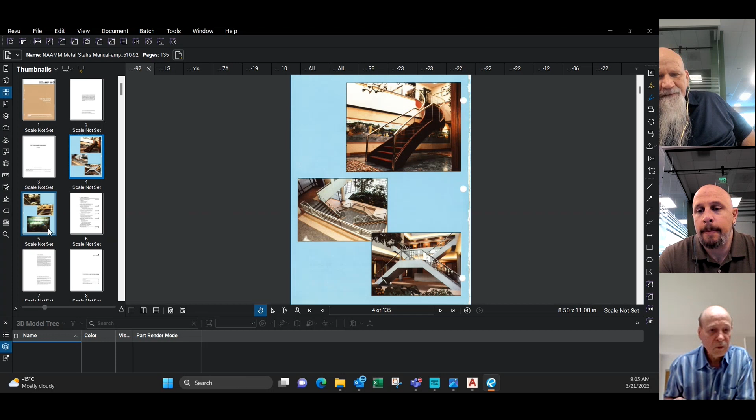Both Tim and I were both at Specialty Welding. Oh, Specialty Welding, okay, then Amazon. That's right, Amazon Hank. Yes, working on that. Yeah, just did that one. Yeah, I kind of did a little bit of work on that as well, just kind of checking drawings. I know Adam Rosenwasser and Eduardo took on the bulk of work, I guess, as project managers on that job. But yeah, that was a nice job. I just got pictures this morning. It looks like it installed really nicely.

Oh, okay, yeah. Are they into the finishing the stair mode right now, or are they still just kind of finishing the install of the stair? I think he said yesterday that they'd be painting this week. I think they're ready to paint. Okay, I see, great, okay.

Like I was saying, this manual just kind of goes through all the different types of stairs that you run into, but I'm sure you guys have probably seen quite a few different types of stairs.

For myself, before I started with Synergy, I was into structural and miscellaneous metals. So I did kind of a lot of your typical pan stairs and stuff. The stairs with Synergy now, some of them are pretty nice, but the treads and risers and stuff like that can change quite a bit. But most of the stairs, it's still your typical channels or HSS tubes for the stringers.

So it just goes through different stairs. We don't really do ship ladders. So it's something to reference if you're ever looking for it. It gets into some details on different types of stairs.

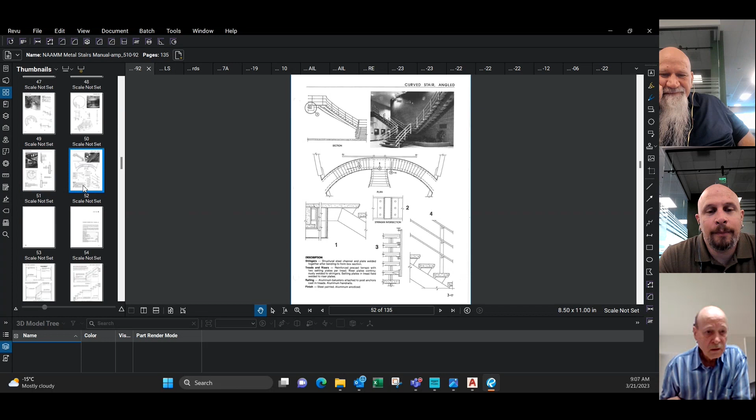And then it kind of gets into some of the construction details, just landings, different types of treads. We don't usually use these - these are more commercial type of treads or whatever. Like I was mentioning, we do supply the treads sometimes for stairs. We do a lot of wood treads, but usually the wood treads and risers are most of the time by others.

Different types of nosings, but that'll usually show up on the architectural drawings, or the project manager would let you know what type of edgings they have on the stair if they're required by the architect. Different types of handrail ends. We don't really do a lot of picket rails. We do a lot of glass rails, I guess, mostly.

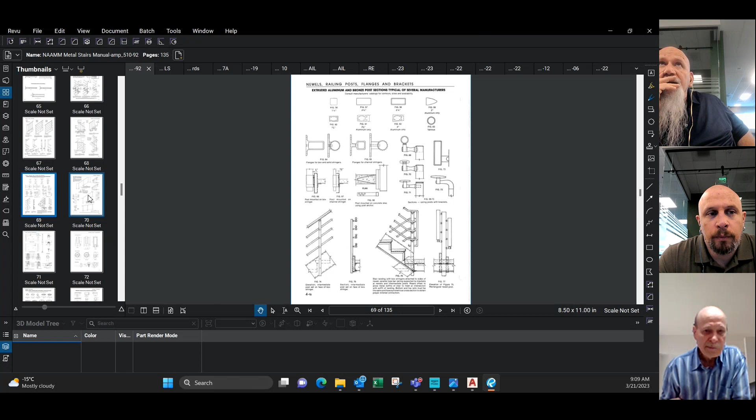Although I think Amazon Hank, though, I think that had pickets, didn't it? Stair F, I think. See, F, we didn't do F. Okay, we did J and H. Okay, yeah, I think stair F, that was kind of the big one that went up quite a few floors, but I think it wasn't really pickets. I think it was kind of bars, I believe, for the pickets.

And then it kind of gets into the glass guardrails, which we do a lot of. It's usually glass sitting in an aluminum shoe, with different types of shoes depending on the thickness of the glass, and different ways of setting the glass in the shoe. Sometimes it's Por-Rok, just a cement that sets the glass, and other times we use a removable glass system that clamps the glass into place, so if the glass breaks it's easy to fix or replace.

So there are different shoe details and different handrail moldings in here that we don't really use a lot. A lot of the handrails are just stainless steel tubes, or wood, or different types of things.

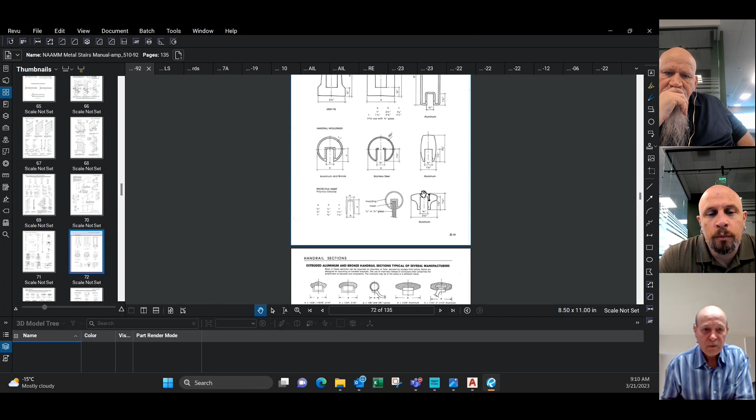And then it gets into more handrail shapes. These are usually defined in the very beginning of the job. We usually have design assist meetings where all this stuff gets sorted out. If you ever have questions, you usually go to the project manager and they'll assist you on whatever questions you have regarding the job and types of material.

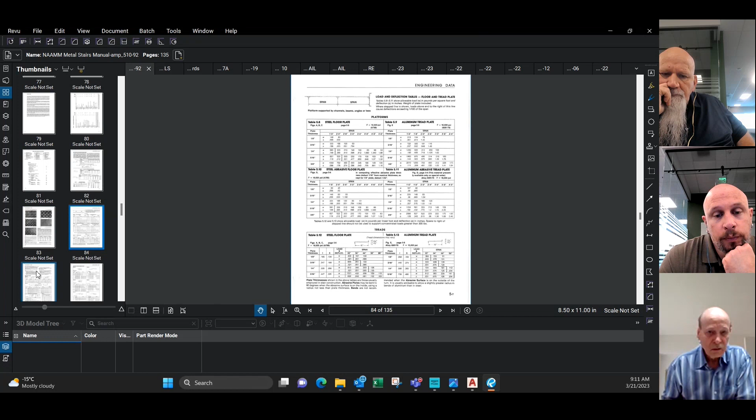And then in the back, it gets into different kinds of loads, which we don't really do. The engineering usually takes care of the loads on the stairs and comes up with the thickness of the tread and pan materials and the stringer sizes, so we don't really get into that. Grating, we rarely use - that's more of a commercial type thing. And then it gets into loads and stuff, but we don't really get into that - that's more engineering.

So it's just kind of a handy manual to have if you're looking for details. This gets into guides and specifications a little bit, different material types, fabrication, and a glossary - so it's a good manual to check into if you want. But usually the project manager would answer most of your questions, or they're figured out in the design assist meetings we do in the beginning, where a lot of things are figured out as far as the stair.

Next on the list, we have the Accent standards manual - same thing, I'm not quite sure where it is in the filing system. That's the new system Synergy has, but I'll send it to you. It's kind of outdated, I think - does it have a date on here? Yeah, this is from 2013, so it's already 10 years old.

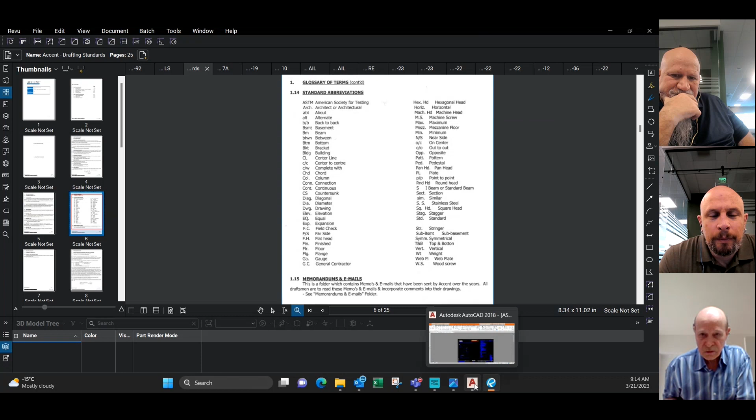I can just open up something else here now - we actually have our standard title block cover page that we use for drawings, and there's a zip file with all the different sheet sizes, like 24 by 36, 11 by 17 for shop drawings - those templates I'll send you guys as well. And we actually now have on the cover page some abbreviations, a glossary of the different types of abbreviations that we use.

So this is kind of overrode, I guess, by what's on the cover sheet. Memorandums and emails - that's something old that doesn't apply anymore.

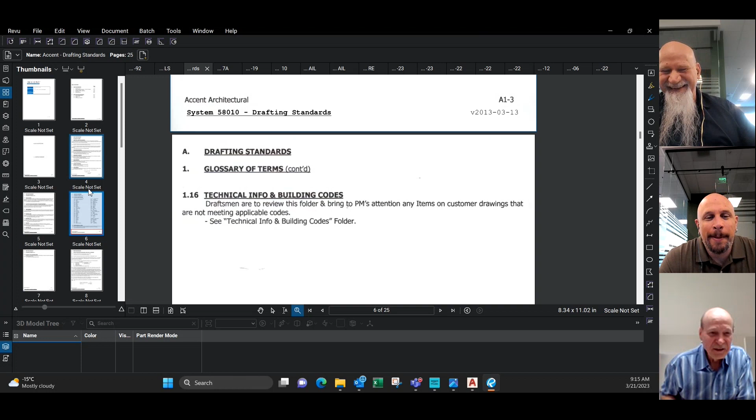Technical info, building codes - technical info doesn't really apply anymore. As for building codes, I'll show some stuff on that a little later, but if you guys have been in the stair industry for a while you probably know most of the typical building codes. If I have a problem with a building code now, I just Google it - all hail Google - or ask one of the detailers at Synergy. Somebody usually knows. They're mostly typical, although I've been finding as we go into New York, they have a little bit different codes - special codes.

Submittal or action drawings, general detailing, and the different sheet sizes - like I was saying, I'll send you the templates for these drawings after the meeting. So that covers submittal or action drawings.

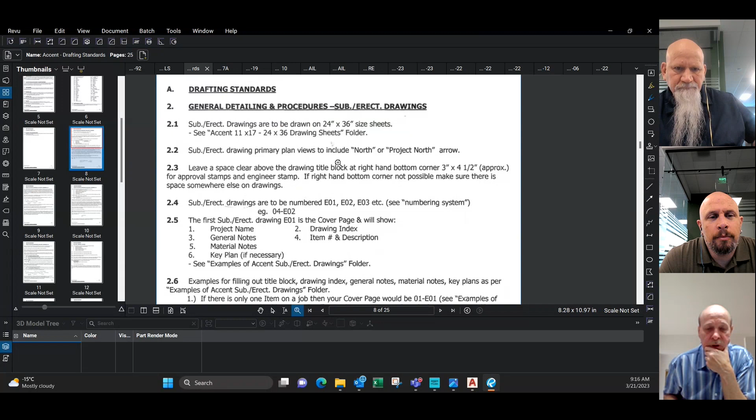Usually we'll put a key plan on one of the drawings. I think I probably have an example here - I don't know if this one has a key plan. Let's see what we got here.

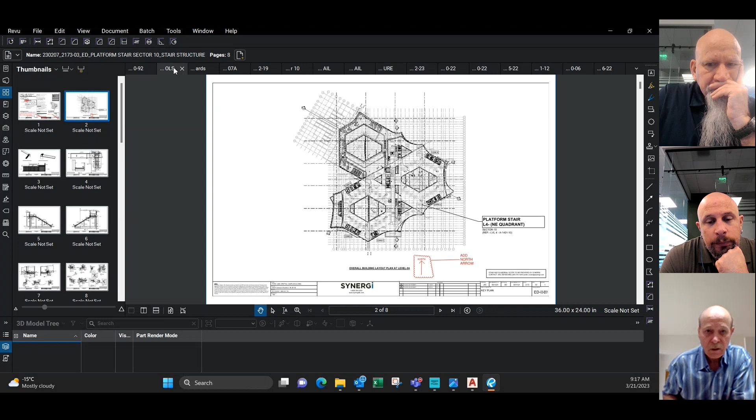This is an example of a key plan. Sometimes they put it on the cover sheet, and there's also a second page that's a larger key plan. You can do either, it doesn't matter, it kind of depends on the size of the job, like if you have multiple stairs on a job. But usually we'll add a north arrow, just to help guys in the building orientate themselves.

This does not apply anymore to submittal or erection drawings. The numbering system we've kind of worked out - we've got a number down in the bottom here. Usually the drawing number is dictated by the item.

And the item is usually dictated by the scope of work. Sometimes, not all the time, you'll get a scope of work - if there's 6 stairs on a job, there might be one stair that's item 1, the second stair might be item 2, the third stair item 3. There might be a guardrail around the opening, that might be item 4. It might be smoke baffle glass underneath, that might be item 5. But usually the project manager breaks that up and lets us know what the item numbers are.

So on a submittal erection drawing, the item number comes first, and then the drawing number comes second. So this example here is item 04 on drawing number 2. As you get into the drawing system, you'll see - I'll send you a couple of sample jobs that will assist you with that.

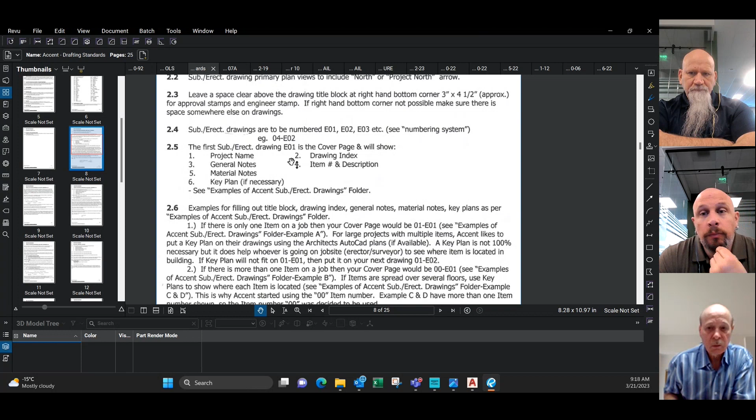The first submittal erection drawing usually has - this is kind of all on the new cover sheet everybody's using now - the general notes that are usually standard. They rarely change.

Material and finish notes would change based on what the job is - the types of steel, types of stainless steel, or the finishes. If there's mesh guardrails, the top rail material, whatever it is, if it's painted, that's where all that is added into the material and finish notes. This is just a standard they put on the cover sheet, but it would change to suit your job.

Usually all the material and finishes are figured out in the beginning in design assist meetings, or from your project manager. I usually do a lot more checking now, so what I do at the beginning of jobs is get the architectural drawings, the structural drawings, and the specs. That's usually what I use to check the material and finish notes, plus whatever I've got from the design assist meetings or the project manager.

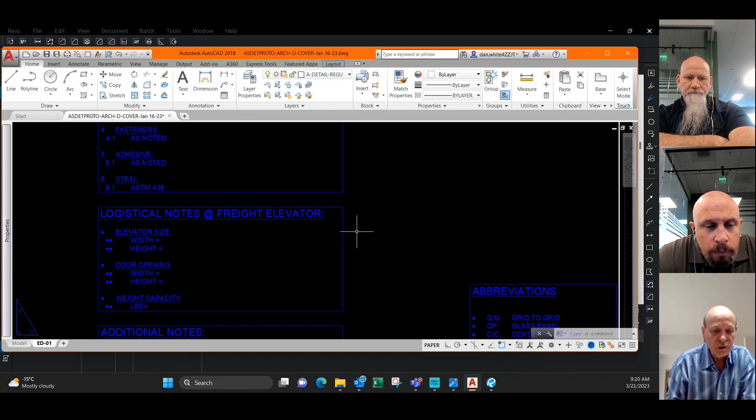So that's on the erection drawings cover sheet. They've also added logistical notes for the freight elevator. Now that we're into modular stairs, they need to be made a certain size to fit through a window, up an elevator, crane through a roof, or however they're getting it into the building - that's usually figured out at the beginning as well, so we've started adding that to our erection drawings cover sheet. For additional notes, if it's a 100% CD set, we add the date of that set on the drawings here for both architectural and structural. I'll show some examples as we move along.

So that's kind of the stuff that's on the cover sheet now. Examples for filling out title blocks - we just kind of looked at that, and I'll show some examples later on. For item number - that's what I was referring to - the item number and scope of work are supplied by the project manager, although they don't always supply a scope of work, but the project manager should be able to help you out with which item numbers to use on the job.

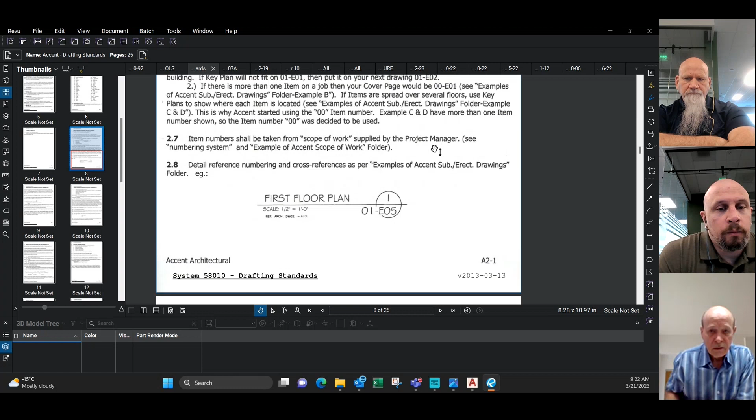Detail reference numbering - this is kind of your typical callout, which I'm sure you guys are familiar with. Again, it's the item number, and then this would be the drawing number.

Field check drawings - we used to cloud a dimension if we needed it to be field checked. Now we put VIF on the drawings right here, so we don't cloud drawings anymore.

Mark numbers, rectangular box, we don't do that anymore. That's just in regards to, on the erection drawing, you'll have a mark number for a post or a piece of glass or whatever. We used to put a rectangular box around it.

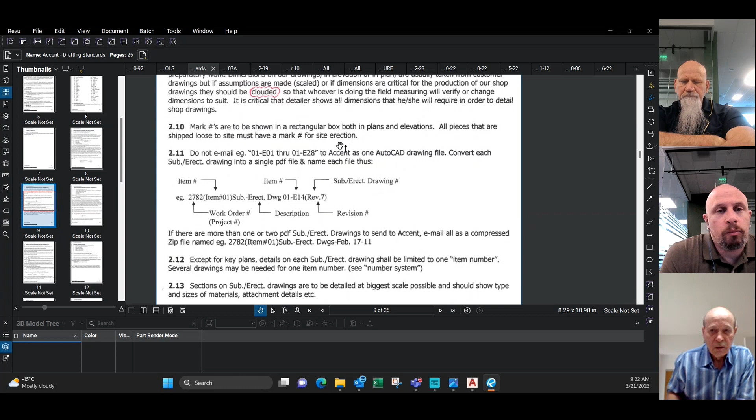Each piece shipped to site must have a mark number on it, which, of course, do not email — that was just about file sizes. Doesn't really apply anymore.

Marking numbers when drawings are sent to the project manager: I kind of use this type of system with the project number, the item number, what it is, then the drawing number, and then the rev number. As we've gone along, different drawings I've gotten from different outfits, that doesn't always apply. So it's not really standardized, but I guess it should be standardized. But because everything goes through so fast, you kind of usually leave it the way it is. That's kind of a marking we like to follow, something along that line.

If there are more than 2 PDFs, submittal erection drawings, send email. That's kind of outdated. Except for key plans, details on each submittal erection drawing shall be limited to 1 item number. Don't do that anymore.

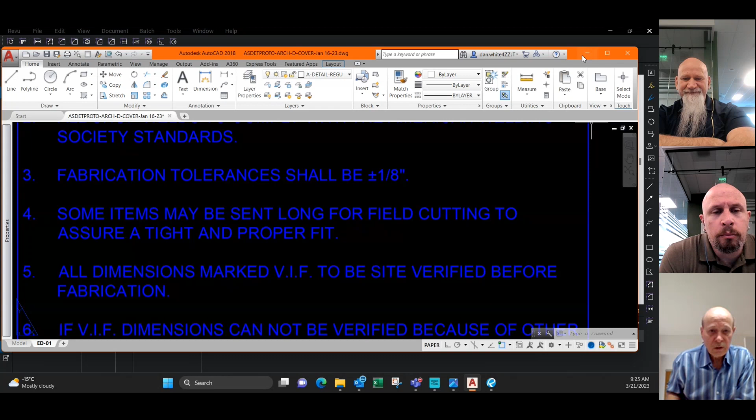Location of field splices for rails and lengths of rails. Sometimes when detailing our handrail, we put our field splices in locations that dictate based on the length of material ordered. These are kind of standard lengths here so that there's not a lot of waste of material. It's not critical, and you can always weld a couple pieces together if you need to, but we usually try to keep it so we're not wasting material.

Need to ask the PM maximum lengths of cladding and glass. Cladding is usually dictated by bending — if the cladding's bent, what the shop can bend sizes, usually around 10 feet or so, but need to check with the PM, and that could dictate your cladding lengths and cladding sizes. Usually the cladding joints are lined with glass joints if there's glass. Sometimes they're aligned with millwork — sometimes there's reveals in millwork that you need to line up with. But that's stuff that can be discussed with the PM.

Slotted holes or oversized holes — usually with posts, connections, and that, we like to use either oversized holes or slotted holes of some size, just to give the guys on site a little bit of adjustment. But that can be discussed with the PM.

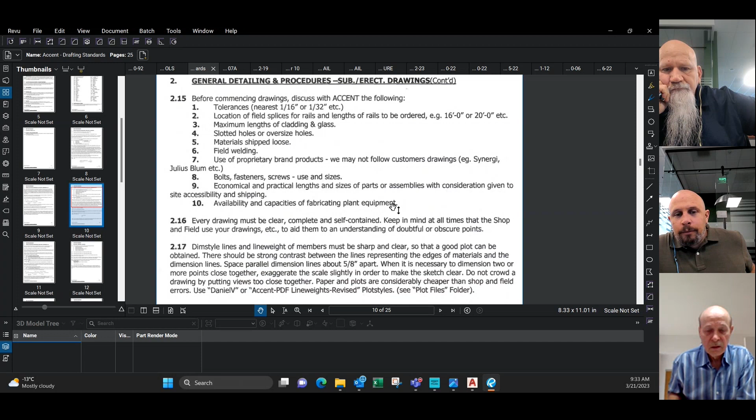Economical and practical lengths and sizes of parts - we just discussed that. Availability and capacities of fabricating plant equipment - that goes back to bending material, especially when you get into radius stringers or radius handrail. That may dictate where you're going to have joints on the finished product. But that stuff is usually discussed at the beginning of the jobs with the PM.

Every drawing must be clear, complete, and self-contained - that's a no-brainer. Dim style, line and line weights - this doesn't really apply anymore. That was back when we were all using AutoCAD and everybody had their AutoCAD set up to different dim styles and line weights. Now we're all using Advanced Steel, so it dictates the dim style and line weights, and it's been set up by Synergi for everybody to use. So at some point, everybody's going to have the same setup.

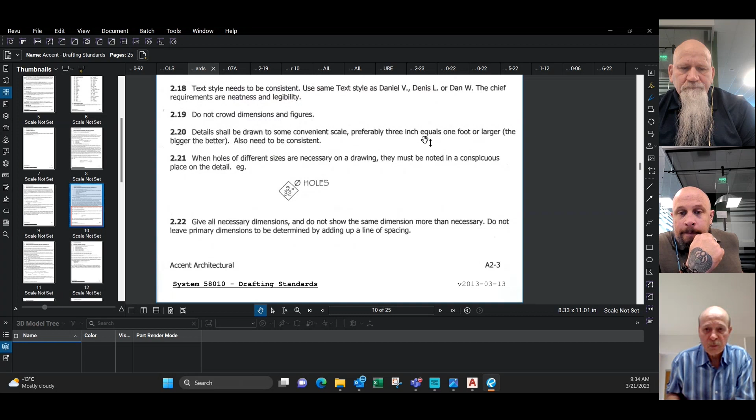And the same with text style - it should all be the same because everybody will be using the same software. Do not crowd dimensions - Advanced Steel kind of does that for us now, so that's not an issue. Details shall be drawn to some convenient scale - we discussed that before, bigger is better, but again, Advanced Steel kind of does that.

Are you guys both familiar with Advanced Steel at all? I'm not familiar with it. I haven't worked with it at all. Neither of us have used it. Oh okay, yeah, I'm kind of in the same boat.

I don't really do that much. I hardly do any drafting anymore, but I'm kind of from an AutoCAD background. I did do the training on Advanced Steel, but that was a few months back, so if you don't use it, you lose it.

I guess you guys will be learning the new system, and we have outside detailers, some of them using Advanced Steel. I think we've got a couple of draftsmen still kind of doing SolidWorks. But Advanced Steel usually spits out most of the drawings to the proper size and everything else. The only thing I've been finding with Advanced Steel is they don't really do a very good submittal erection drawing. Not that they don't do it, but especially for spiral stairs and stuff, they just don't look that nice because they draw it segmented, so a lot of black lines and stuff. It doesn't look that great, but we're working on fixing that.

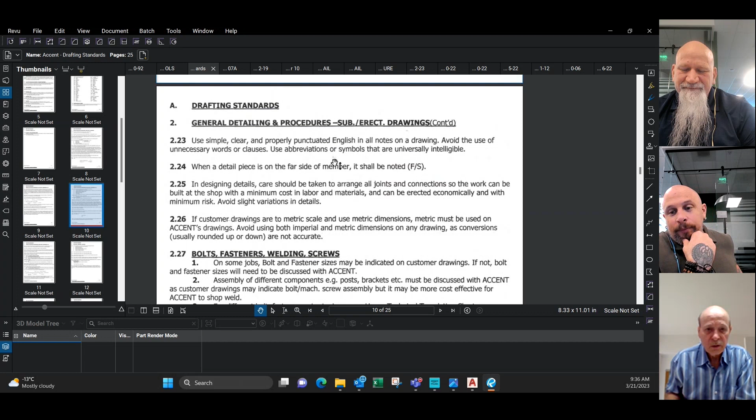General detailing: use simple, clear, and properly punctuated English - that's a no-brainer. When a detail piece is on the far side, it should be noted as far side, FS. I think that's in the abbreviations down here. Maybe not, but that's a typical standard, I guess. FS is far side and NS is near side.

In designing details, care should be taken to arrange all joints and connections so the work can be built at the shop. That's kind of figured out in the beginning. Goes back to what I was mentioning with field joints - that's usually figured out in the beginning where they're going to go.

If customer drawings, we don't use metric - bolts, fasteners, welding, screws. On some jobs, bolts and fasteners may be indicated on customer drawings. The bolts and fasteners are usually figured out by the engineer, so that covers that. Assembly of different components, post brackets - same thing, it's discussed with the engineer and the design assist team in the beginning of the job.

For different bolts, fasteners, nuts, we don't use that chart anymore - it was a little chart that showed us different types of fasteners. Now we typically go to McMaster-Carr or whatever and find a bolt on there. I don't know if you guys are familiar with them, but they have a lot of 3D and AutoCAD details of different bolts, fasteners, nuts, washers, everything.

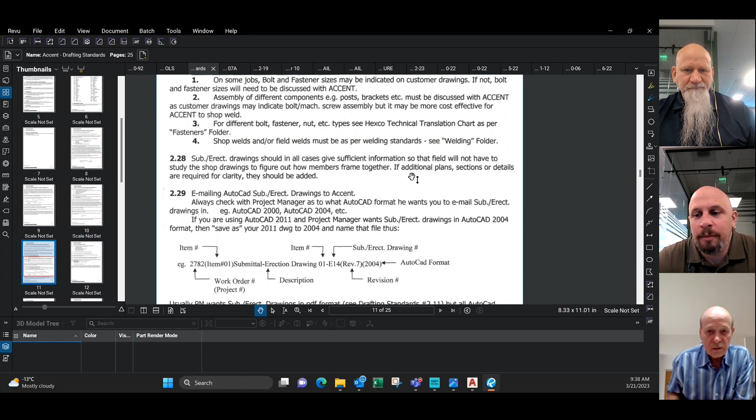Submittal erection drawings should in all cases give sufficient information so that the field will not have to study the drawings. That's basically just showing enough information, enough details so that the field can figure out how it goes together.

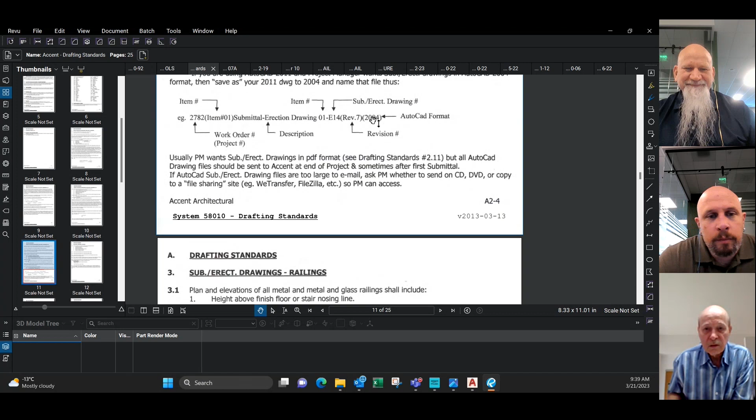Emailing AutoCAD to Accent - AutoCAD format, that's old, doesn't really apply anymore. This is usually the name I would put on an AutoCAD drawing if sending it to Synergi: the project number, the item number, what it is, the drawing number, rev number. This AutoCAD format doesn't apply anymore - that's a little old, that's way old.

Usually the PM wants submittal in PDF format, but that's kind of typical. The PM will tell you what they want as far as format, whether it's a 3D model or PDF or whatever they want. PM task, yeah, CD, DVD, FileZilla - I don't even know if they're around anymore. But yeah, the PM will let you know what they want and how they want it sent.

Submittal erection drawings and railings: plan and elevations of all metal and metal and glass railings shall include height above finished floor or stair nosing line - that's usually just a dimension from the finished floor to the top of the rail. Support post location, that's usually an elevation, you'll show dimensions to posts. Descriptions of all materials - Advanced Steel, I think, does that. I believe it'll give a description like HSS 2 by 4 by half or whatever. Details of attachment to floors and walls - that's just your typical detail of how it goes together.

Centerline radius of all bends. I'm not quite sure what Advanced Steel shows, like if you did a radius stair where it kind of dimensions the radius, if it's to the inside, the outside, or the centerline—whatever Advanced Steel does, that's what we'll be using.

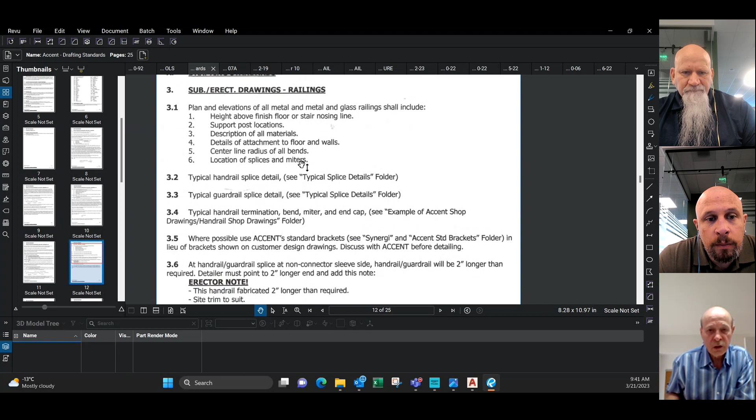Location of splices and miters. Yeah, that's usually for your handrail, guardrail. Now that we're doing modular stairs, sometimes the actual guardrail is a panel, a modular panel, so we'll have splices in certain locations. That needs to be shown on the drawings, either in plan or elevation, with an enlarged detail of the splice.

Typical handrail splice—when I send you the example jobs, you'll see there's some splice details in there. Some are kind of typical that we use over and over, like for 1.5-inch diameter stainless steel handrail. There's a typical detail we use. If you're having problems figuring out a splice, there's people on the team that can help you out with that.

Typical handrail termination, bend, miter, and end cap, usually on the architectural drawings for bends. Sometimes when a handrail goes around a corner it'll be mitered, sometimes it'll have an elbow. Sometimes we have end caps on the end, sometimes we don't, but usually that's on the architectural drawing, or you can ask the project manager what they're doing on that particular job.

Where possible—it's not Accent anymore, it's Synergi standard brackets. Synergi used to make their own brackets, but they don't anymore. That was back when they were in the mall guardrail replacement mode. They used to make standard brackets, but we don't anymore, so you can ignore that.

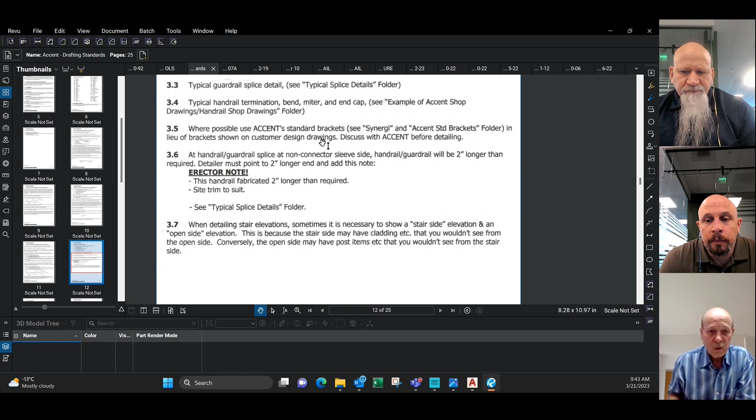At handrail, guardrail, splice at non-connector sleeve side, the handrail or guardrail will be 2 inches longer than required. That's if we're talking tube handrail—usually we have an aluminum sleeve about 5 inches long, so 2.5 inches in the handrail and then 2.5 sticking out, glued in place. You'll see that on the typical handrails we have. But the piece that butts into that, we usually make 2 inches longer, just so the site has a little bit of play, not exact.

I don't know how easy that is to do in Advanced Steel, because it'll make it exact when it does a shop drawing. Usually when I check it, I'll ask them to add 2 inches in—I'm not quite sure how they do that, but they do it, so there must be a way. Then I'll put an erector note telling the installer that the handrail's fabricated 2 inches longer than required and to site trim to suit. That gives them a little bit of play when installing it on site.

When detailing stair elevations, it's sometimes necessary to show a stair side elevation and an open side elevation. We don't really do that much anymore, but if you've got cladding or something, you'll usually show the elevation from the stair side, because that's usually where they're erecting it from, especially if it's glass or posts. They're usually working on the stair side, but sometimes you need to show the open side if there's material like cladding or perforated panels that might run down to the floor.

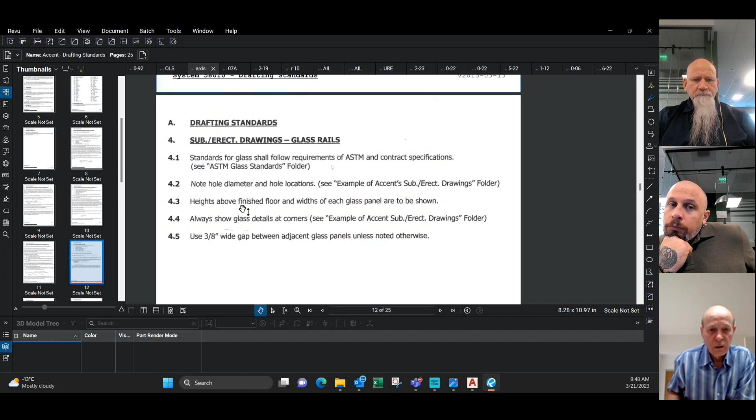Glass heights above finished floor and widths of each glass panel are to be shown. I'll show an example of that later on. That's just saying you need to show the length of the glass, and if it's a half inch joint - sometimes it's half inch, sometimes it's 3/8. We've had some jobs where they wanted a 1/4 inch joint, and usually that's shown in elevations on the drawings.

Always show glass details at corners. I don't think this example applies anymore, but I usually like to show a 3 inch to a foot detail for a corner, showing what happens at the glass at corners. Sometimes it'll be a half inch gap, or sometimes one will run over, or this one might run through, so it's a good idea to show a blown up corner example for the installer so he knows what's happening with the glass at the corners.

Use a 3/8 inch gap, that's kind of the standard we use, but it depends - it may be shown on the architectural drawings. If it's something like a 1/4 inch, usually we don't like to use that because it's so tight. If the architect's asking for a 1/4 inch gap, it's something that should be discussed with the project manager to see if they want to do that. There was one job where we tried to get them to change it, but they wanted the 1/4 inch gap. It just makes the tolerances so tight - if one piece of glass is slightly out, it's noticeable with a 1/4 inch gap. We don't like to use that, but it depends on the architect.

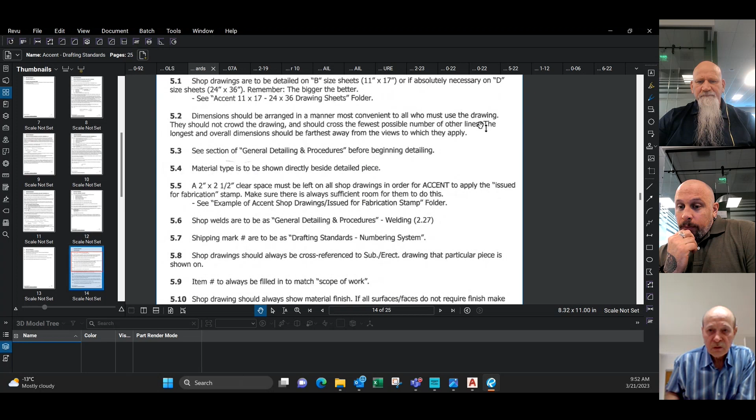Dimensions should be arranged in a manner most convenient to all who must use the drawing, and that's kind of done by the Advance Steel software. I found that the way the dimensions are usually set up is pretty good. See the section on general detailing and procedures before detailing - well, we just kind of went through that. Material type is to be shown directly beside the detailed piece. Advance Steel does that, it's on the drawing.

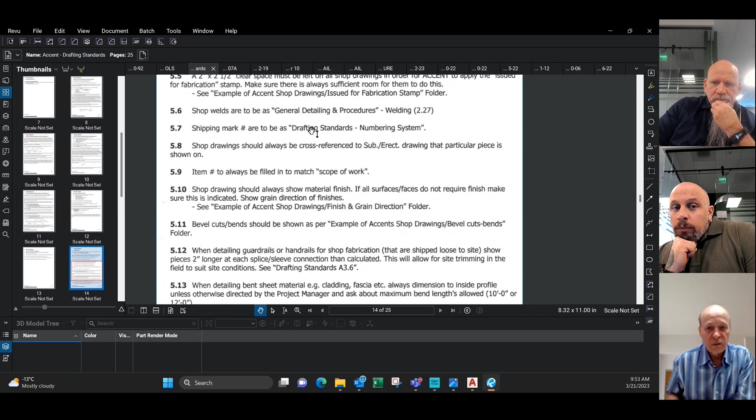This doesn't apply anymore, that was something we used to do with the shop. Shop welds, we went through that already. Shipping mark numbers, yeah, mark numbers for pieces. We used to have standard shop drawing numbers we used, but Advance Steel kind of generates its own marking system now, which is fine. We're kind of adopting that now. It seems to work, so.

Shop drawings should always be cross-referenced to submittal erection drawings. That just means that down in the bottom of the title block for a shop drawing, there's usually a reference box that refers to the erection drawing that piece, that member, is shown on.

Item number to be filled in to match scope of work. That's just the 2 digits in the front of the number we went over.

Shop drawing should always show material finish. Correct, and that's the same thing in the bottom of the shop drawing. Along the bottom, there's a little box where you can put, if it's a stainless steel piece and has a number 4 finish, that's where you would put the number 4 finish.

Show grain direction of finishes. If it's a number 4 finish, we used to put a little arrow on the material showing, if it was a long piece, the direction of the finish along the long surface. We'd put a little arrow pointing both directions showing that was the direction of finish. But that can also just be noted in the template at the bottom - number 4 finish with grain running in long direction is fine as well.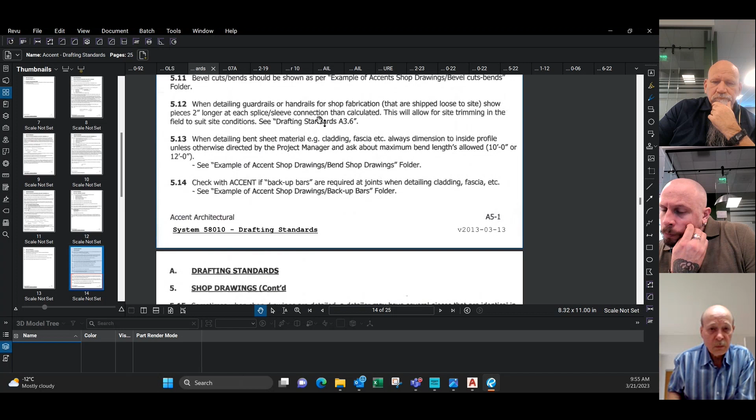Detailing bent sheet material, cladding, fascia, always dimensioned to inside profile - that doesn't really apply. Advance Steel kind of dictates that now, but you need to ask the project manager. The allowable bend length, 10 feet or 12 feet, is usually the two lengths.

Check with accent if backup bars are required at joints. Sometimes when we do cladding, they want a backup bar at a joint so the seams don't open up and you can't see through. We don't really do that much, but it's a good thing to ask. Usually it's like 20 gauge cladding that we would use, but it needs to be asked, I guess.

A lot of these folders it refers to, I don't know if Synergy even has these anymore. So I would ignore this, and if you have some questions, just ask your project manager.

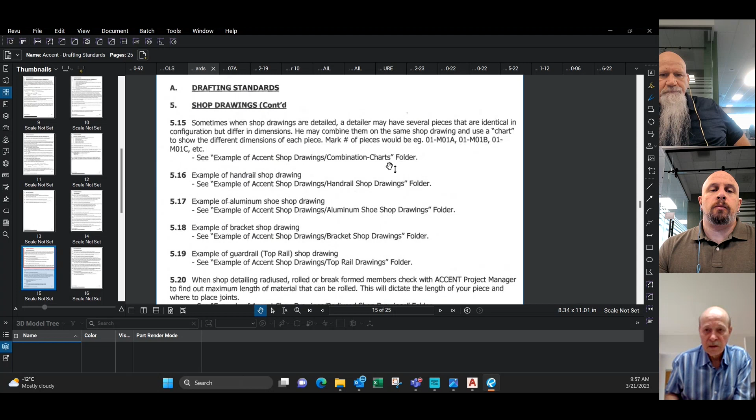Sometimes when shop drawings are detailed, a detailer may have several pieces that are identical, but that doesn't really apply anymore. We used to, instead of having 20 drawings of the same piece at different lengths, have one drawing and call one M01A at 10 feet, M01B at 15 feet, M01C at 16 feet, just to cut down on drawings. But Advance Steel kind of spits out what it spits out now, so that doesn't really apply - I think it would make each piece different now, but it is what it is.

This is just some examples referring to different folders where I had different examples. I don't know where those would be now. But I will send you sample jobs to help you out with all of these different details, showing what needs to be shown. Advance Steel also kind of spits out what it spits out as far as details of shop drawings.

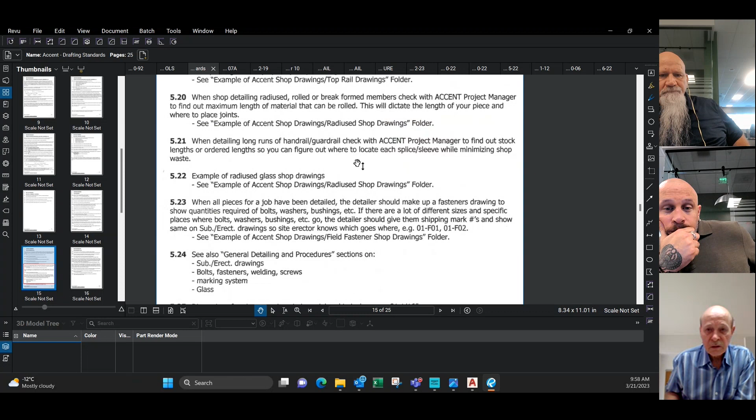Shop detailing radius, rolled or break form members - check with the project manager, not Accent Synergy sorry, to find out maximum length of material that can be rolled. Yeah, we discussed that already. When detailing long runs of handrail, guardrail, check with Accent to find out - we discussed that already.

This kind of goes over different things we've already gone through. It goes on and on, so I'm not going to keep going on. I'll send this to you guys and you can go through it. Like I say, a lot of stuff might not apply anymore.

Tempered glass logo, that's something sometimes we do, sometimes we don't. Sometimes we ask the project manager, and instead of a logo, they just give the customer a letter saying that a certificate, I guess, will be provided in lieu of logos. Because logos are kind of a pain in the butt, because you want to keep them all in the same place.

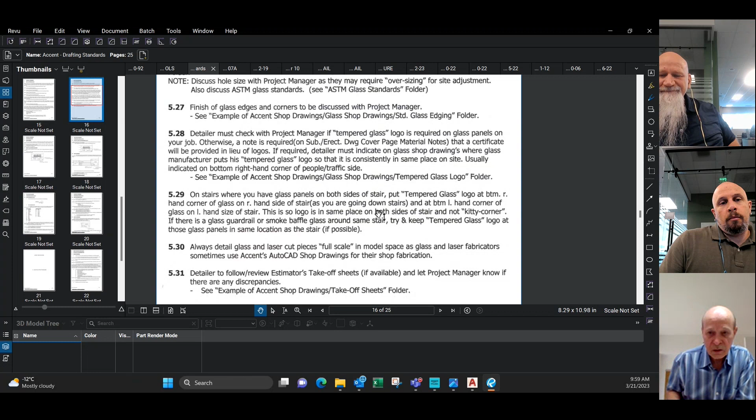But when you're flipping glass around, sometimes they end up in the wrong places, especially on stairs. If you have a panel on both sides of the stair and you always put the logo in the bottom right hand corner, when you detail it, it would end up in the wrong corner for the one opposite, so they'd be kitty corner. So we try and get away from logos if we can.

Usually we'll have a job here somewhere, and we'll put a note in the material notes about the logos. That job didn't have glass. Let's find a glass job. Atrium ribbon stair. Where's the other one? I thought I had Rutgers glass, I guess I didn't.

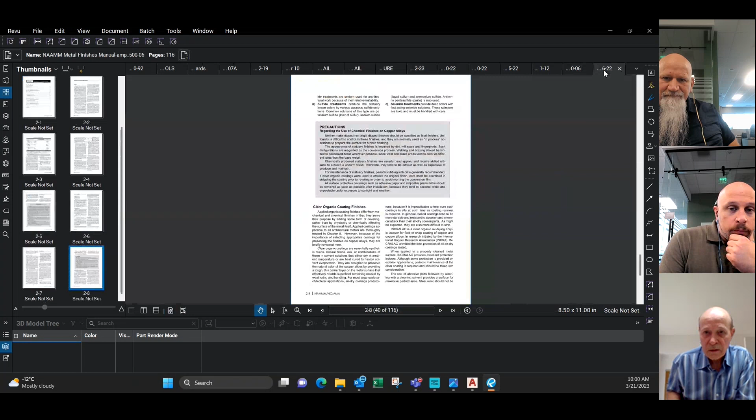Okay, sometimes it's noted in the material and finish notes. Guardrail, handrail, yeah, that's for the stair. Sometimes we'll put in there that instead of a logo, we'll give them a certificate just saying that it's tempered glass. But that's something that needs to be discussed with the project manager.

Always detail glass and laser cut pieces full scale. That's kind of what Advance Steel does on its own. Detailer to follow and review estimator's takeoff sheets. We used to, a long time ago, when we detailed a job, get takeoff sheets from the estimator and check that as we went along, just as a double check to make sure no materials were missed, but we don't really do that anymore.

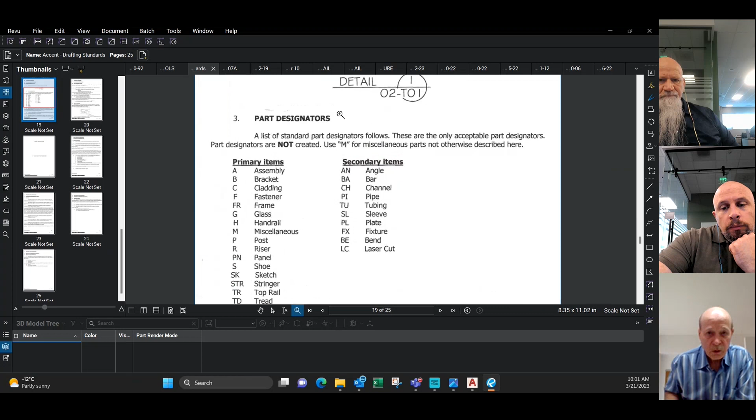Detailer to follow and review ASTM glass standards, I'll send you that. Then we kind of get into some of the mark numbers that we would use, but it's been set up now. I don't know if we're using these anymore because Advance Steel kind of spits out its own different marking system.

We used to, if we had a piece of glass, it would be, if it was item 1, it would be 01G01, 01G02, 01G03. And for handrail, it'll be 01H01, just kind of as an indicator. But now that we've come up with a standard, this is actually an erection drawing, not a shop drawing.

Yeah, just let me see here if we've got one, let me just open up a shop drawing here and see what it looks like. It probably doesn't have a mark number on it, I don't think. Is it in here? No. For stairs, sample jobs, those are all sample jobs. Can't remember where I put it now. There it is.

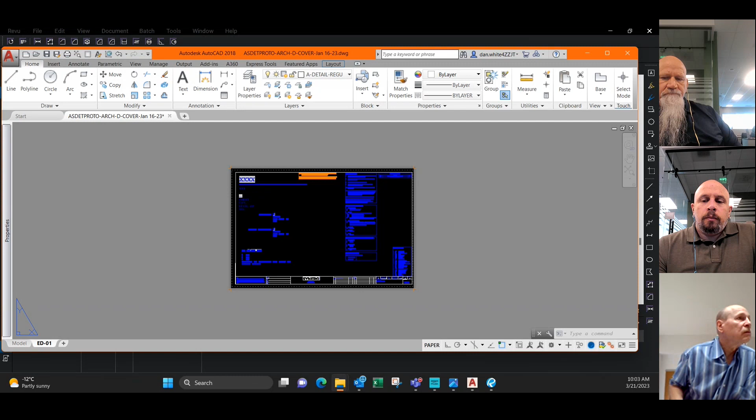Architectural D, A, D. These are all D. Single. See if that's it. Yeah, I guess this is the shop drawing, but he doesn't have a mark number on here.

But FD, I guess, is for fab drawing, and this number would be changed. So if you were detailing a piece of glass and it was item 1, it would be 01G01 if it was your first drawing. I believe that's the way it should be marked. Edward may say something different, but I think that's the way it should be marked.

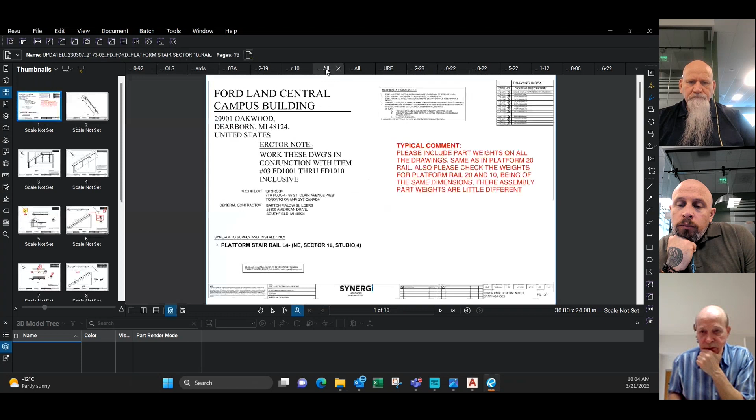But again, in Advance Steel, I think it kind of spits out its own drawings. I just want to see here. Yeah, see, this is an Advance Steel shop drawing, and it's got a totally different number. It doesn't even use, like, this is a guardrail, it doesn't even have a G number or a G letter in it. So I guess Advance Steel does what it does.

Which is fine, as long as that number is on the erection drawing for the installer, I don't have a problem with the way the drawing numbers are marked. But that's his drawing standards, that's kind of what we used to do. Probably the guys detailing in the office probably do use these letters, but the drawings I was showing there, they're an outside outfit, so they're obviously not following this. But when I check it, I just leave it. It's fine as long as it works. That's the main thing.

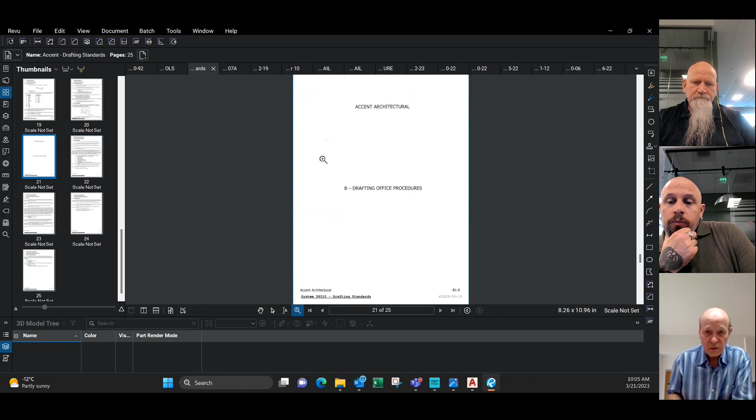What else we got? Synergi, brought intro to stairs. I just opened this up here. These are some sketches I made at one point. I was going to do a lessons learned file, I guess, for Synergi. It got part finished—I never finished all of it, but these were some of the sketches I made.

When detailing elevations, glass joints on stairs, just be aware that sometimes they need to be lined up with window mullions or reveals in wood or whatever. Just something to keep aware of, but that'll usually show up on the architectural drawings.

We do use control lines on jobs. That can be discussed with the PM. The control lines help the installer install glass. Like if this control line was 5 foot off a grid line, and we knew where the window mullions were going to be on the drawings—even though the mullions weren't there yet—we were installing the glass, we could use the control line and set the glass, and then we know it's going to be in the right spot when whoever puts the window mullions in, or the millwork reveal, goes in. So it's a good thing to use control lines.

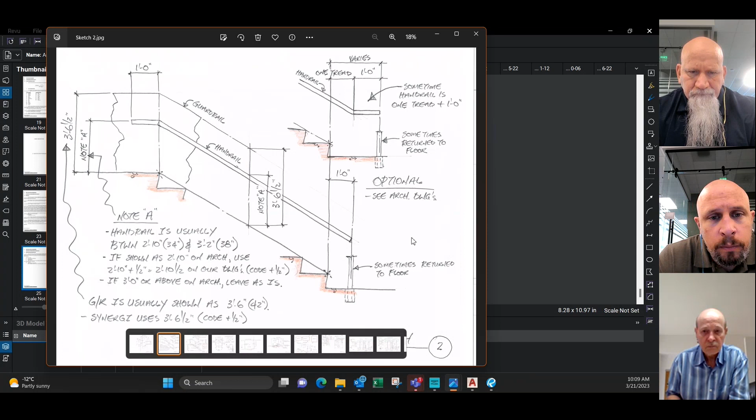And then we get into, you guys are probably familiar with this for code: a 4-inch sphere can't pass through, and a 6-inch sphere on the stairs can't pass through. The 3'6.5" again. The headroom is usually 6'8", although I think New York is 7 feet. But it needs to be checked to make sure we're within code.

You don't need a guardrail required unless it's more than 30 inches—so if it's 2'6" or less, you don't really need a guardrail. Usually the standard for code for rise and run is 4-inch minimum and 7 3/4 maximum rise, and then a 10-inch minimum run. Nosing is 3/4 to 1.25" max. If there's no nosing, minimum run is 11 inches.

I'll send you this stuff as well, you guys are probably familiar with this. The width minimum is 36 inches, but that depends on what the stair is being used for. I think it can go up to 44 inches in some cases, depending on the type of stair.

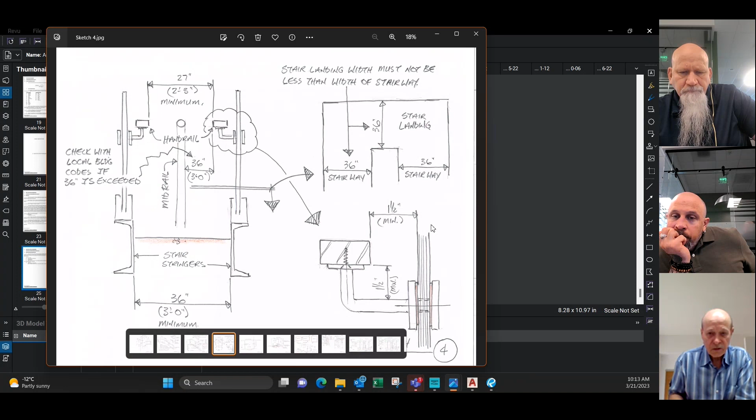Because sometimes, I mean this is exaggerated, but sometimes the floor can be pretty wonky. I always find that they dip in the middle, especially old buildings. If they're an old building, if you have 2 concrete columns, the floor always seems to be lower in between - they sag. But it's always good to work with benchmarks so that we know exactly where the finished floor is, so that we can tell the installer that's where you need to be off the benchmark.

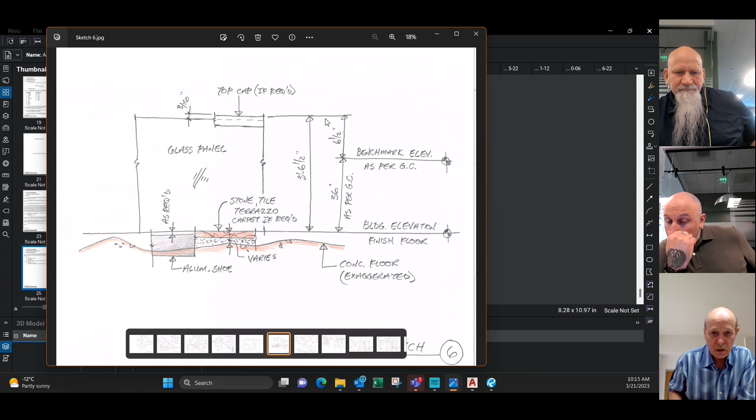And this is what I was kind of just discussing. I would go around an opening and take a measure every 6 feet or something and kind of find wherever the high point was. And then the high point, that's where, like if it was just a polished concrete floor or something, I would find the high point, find the benchmark, and then go 3 foot 6.5 above the high point.

Why is this stupid thing on here? Oh, there. Yeah, so I'd work from the high point.

And we draftsmen don't do any of the site measuring anymore. Now we have teams that go out and do that. And usually we'll get a heat map or a point cloud, which kind of gives us that information.

And this sketch was kind of in regards to control lines. Same thing, control lines help the installer set the stair. If we know where the grid lines are, we can set control lines off the grid lines and give dimensions to the control lines. We don't really put that on our drawings anymore, but it can be added if required.

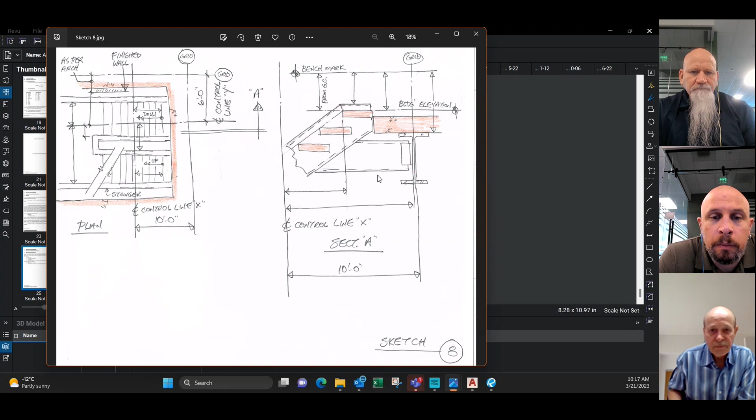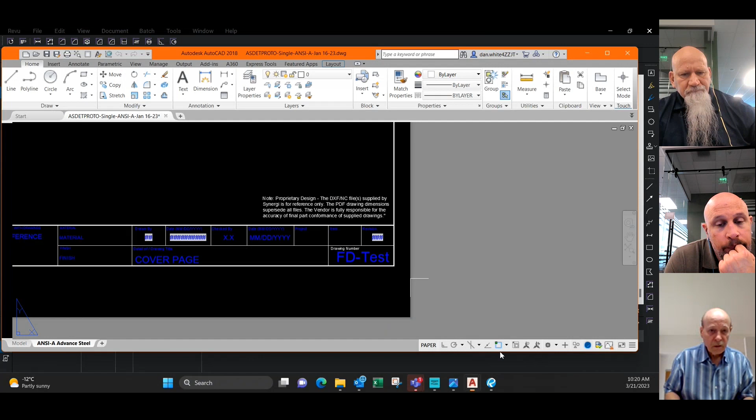Arrangement of drawing sheets - that's basically the AutoCAD we were looking at, which I'll send you, the cover sheet. There's a couple other drawings in there too. Let's see what else we've got. We've got architectural D cover, which is the one we're looking at, and then architectural D. I think this is probably a D size shop drawing, maybe.

Yeah, this is just a different, I guess, a blank ED. I guess this is what you'd use for your - it's not the cover page, but it's an erection drawing you'd use for your elevations and plans.

What else we got in there? We got this one here, an assembly. So this is an assembly drawing, so this would be your field draw, your fab drawing, cover page on 24x36. So it looks like we're probably going that way with the assembly and the parts. Or does he have a part drawing here in this folder?

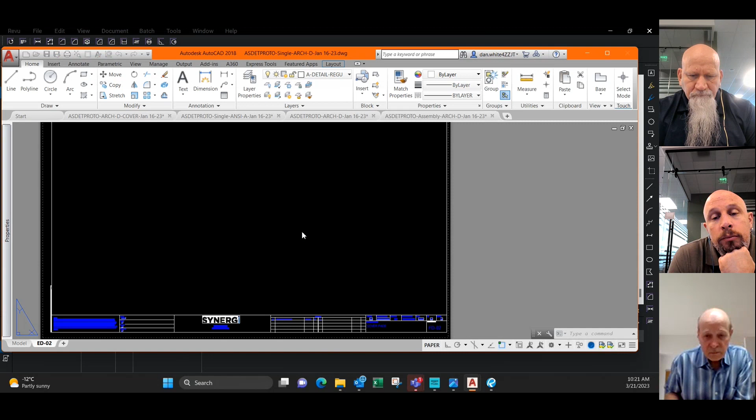Yeah, this looks like a part drawing here. But yeah, this is a part drawing. So we are using the 24x36 for part drawings instead of the single drawings, which is good. So I'll send you that folder.

And if you have any questions with that folder, with the actual templates and stuff - Edward's, I don't know, have you guys met Edward Garcia? Yeah, we had a meeting with him yesterday.

Okay, he's kind of the one who set up the erection drawings and that. So if you've got any questions with how to use it or whatever, he's kind of the guy for that, or one of the other draftsmen can probably help you out.

We do have - I don't know if you've seen it yet - but there is on Microsoft Teams a chat page which has all the detailers on it. So if you have a question in regards to an Advance Steel question or something, you just throw it on there, and usually somebody on the team gets back pretty quickly to help you out, which is great.

Next we have preferred plot styles, sheet layouts, line weights, hatching, fonts, layers. That doesn't really apply anymore because it's all done by Advance Steel now. That's been set up by Synergi as far as line weights, hatching, and fonts - all that stuff has been set up by Synergi so that everybody on Advance Steel is drawing the same thing.

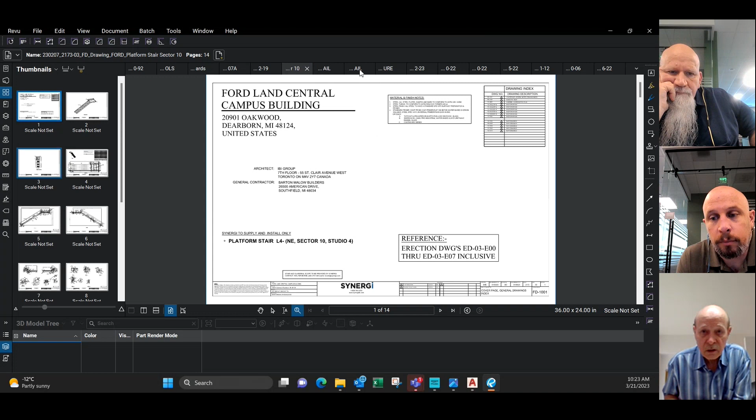This is a drawing or a job that's in the works right now. It's Ford Land - there's 15 different stairs on it. It was subbed out to a different outfit to detail it. It's actually a shop drawing. Okay, let's go back here, find what I'm looking for. Okay, so this was done by an outside detailer.

So he basically, in the beginning, detailed the submittal erection drawings, or IFA drawings, I think we call them, which is issued for approval. These drawings have been back and forth quite a few times, so because the shop drawings were detailed, they've been kind of updated. Just some erector notes and stuff have been put on that weren't in the original IFA set that went for approval. This is more now for the guys on site as far as erection and stuff.

So this particular job had 15 stairs. This is one stair - it's item number 3.

This should say E01, not E00. We don't do the E00 before. I think in the drawing standards, it still mentioned this E00, and that was because if you had a big job with 15 items, and each item was like 01, 02, 03, 04, it was sometimes packaged in the same job or set of drawings, and the cover page, instead of being E01 or item number 03, we'd use 00. That's where the 00 came from, but this should be E01 now.

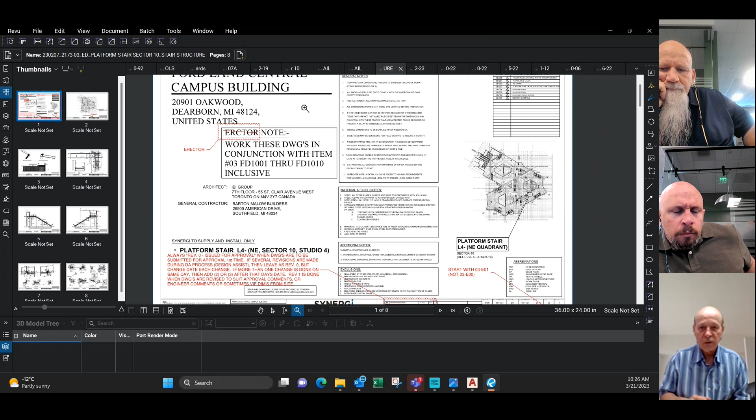So this was item 3, and it was broken into - we don't do this on all jobs, but sometimes we do - we break the job into 2 parts, the stairs and the rail. The reason we do that is so the stair can go through the approval and engineering process and get done, then go to the shop before the rail goes, because they want to put the stair in first and follow up with the rails after. So the project manager will say, let's break it into 2, and we'll do a set of drawings for the stairs and a set for the guardrail.

So this set was the set for the stair. This was one stair, and there's a key plan that shows where it's located on the job site. The next drawing was a larger key plan that just kind of pointed to the same thing. Then the third drawing, sometimes we'll put an isometric view in there - from the model that's created you can just take a couple of snapshots and add it in.

Then it gets into the plan view - I don't think he has a mark number on here. Actually I think he put the mark number on this piece. Yeah, there's the mark number. So there's usually a plan view, and it'll have callouts on it for sections and elevations.

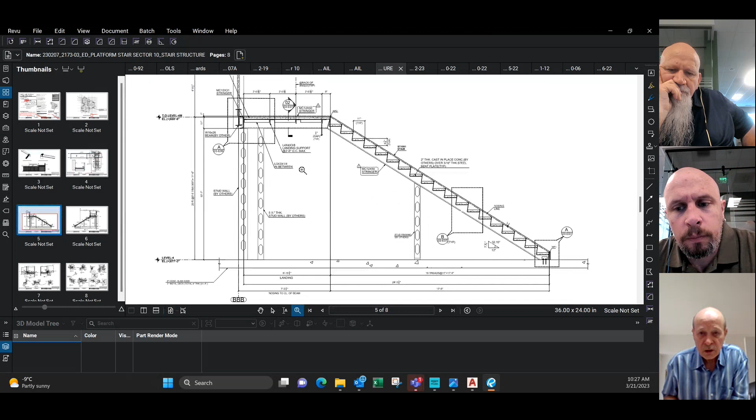And this will describe all the structural components of just the stair for this set of drawings - elevation of the other side, and a couple of elevations at the top of the stair, and then it gets into some sections and details.

If the drawings have been revised, usually in the design assist phase when we're going back and forth with changes, we don't change the rev number. We'll leave the rev number as 0 because it hasn't gone for approval yet, and we'll change the date every time we issue it for checking. We only really do rev 1 after it's gone for approval and come back, and then we'll mark it up as rev 1, especially if it needs to go back as revise and resubmit - if we have to send it back, it's got a rev 1 number on it.

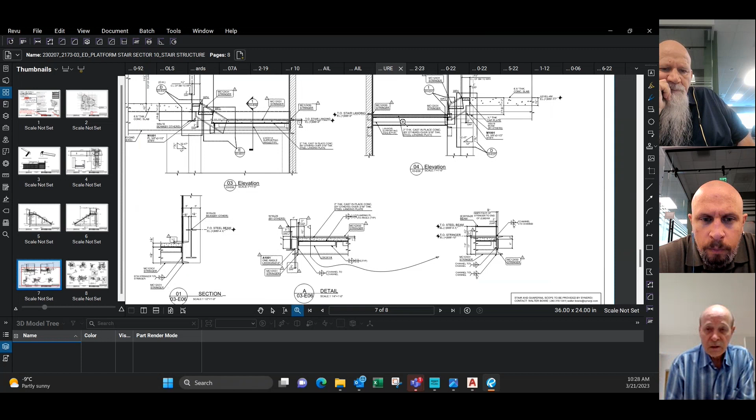Sometimes it might have to be revised to suit site. We're trying to get site dimensions early in the stage of detailing erection drawings, so we know what our floor to floors are and don't have to revise them, because it's time consuming to revise the model if the floor to floor changes. So it's nice to get that up front, and I think Synergi's been trying to get that information as soon as possible.

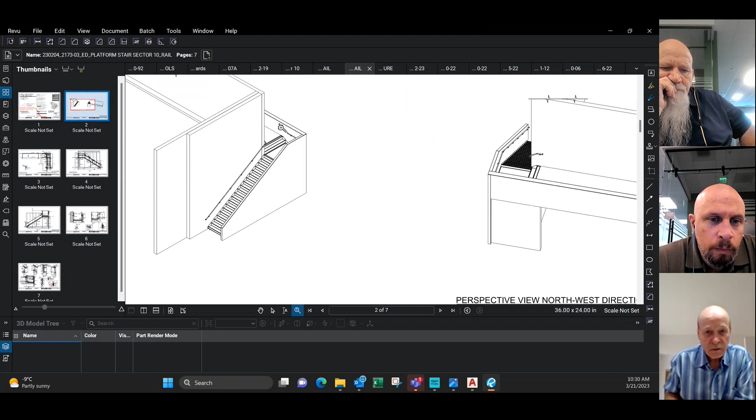And some more details - so that's the stair structure set, and then this is the rail set. It's basically the same set of drawings, just showing the guardrail. This stair just had a handrail on this side up, then up this one tread stair, and then down the sides on this side. So same thing, you have an isometric view, then a plan view showing the handrail, and then your elevations.

And these are the splices I was talking about. Usually you locate the splice and then you show a detail. So there's a detail for the splice at the guardrail, which is an HSS 2x2 buried in the wall. Then you have your handrail, you've got a splice and a splice detail for the handrail, which is - that's our guardrail splice. Because it's buried in the wall, we can just weld it since you're not going to see it.

For the handrail - where was the handrail? The handrail splice is at E12, so E12, 16, 15, 14, 13, 12. Yeah, this is a typical handrail splice. One side has the glued sleeve, and the other side is glued on site in the field.

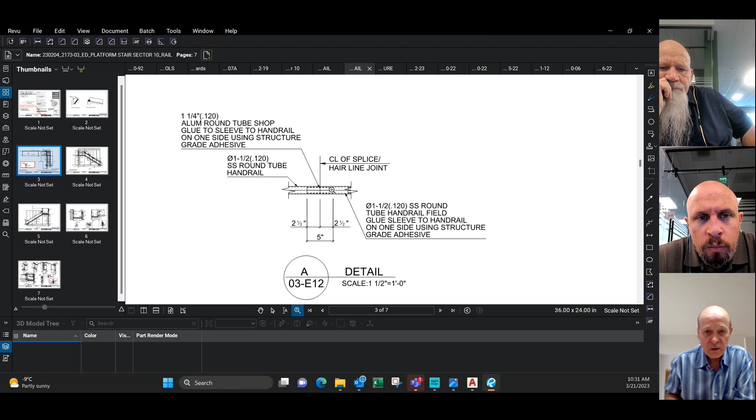It actually doesn't have a note here that this side should say note to erector: this side is 2 inches longer than required, site cut to suit. But when I check the erection drawings or shop drawings, I make sure the handrail is 2 inches longer, and they can figure it out on site - it's better to be longer than shorter. So that's the railing set.

And then we get into the fab drawings - where did I put them? Yeah, these are the fab drawings. Is this just the stair or the rails? Yeah, this is the stair. So this is the stair set of shop drawings.

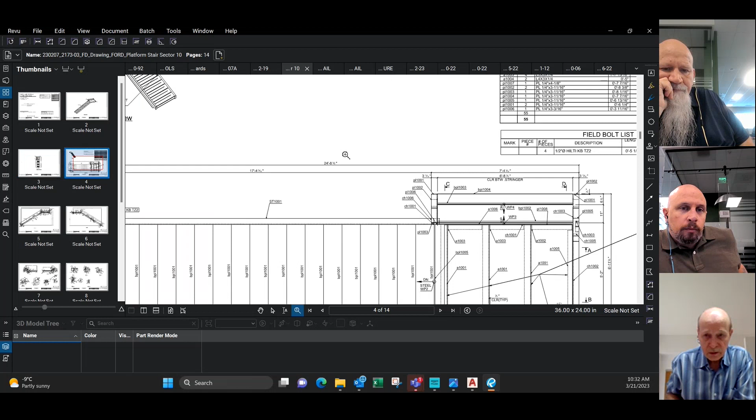You have an assembly drawing, there's an isometric and a plan, showing some dimensions, and then the actual shop drawings. This particular stair was made in one piece, and we were able to do that because we could get it into the building and it could be shipped all as one unit. And elevations, just showing details.

And when you get into the details, that's when you get into the welds that are required. Usually no paint if these are concrete filled pans, so there's no paint on the inside, or on the landings, no paint on the landing pan.

Not sure why, when they did these drawings, they didn't really need to show the field welds because they're shop drawings, but they just kind of copied it from the erection drawings and added it. So I just left it.

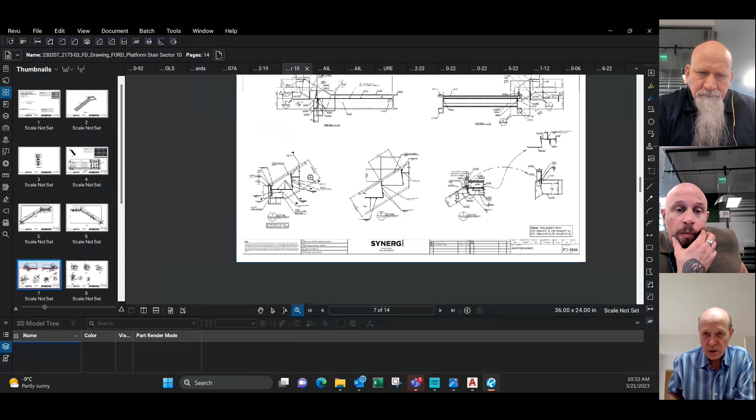So different details, more details with all the mark numbers, all the pieces. And then they get into the actual shop pieces. This is on a 24 by 36 sheet, which I prefer, and I believe this is Advance Steel as well. So I guess this is what it spits out as far as details, all the different pieces, it's got the hole size.

This piece is shipped loose. I think that's the angle at the bottom of the stairs. You leave it off so it's adjustable if needed.

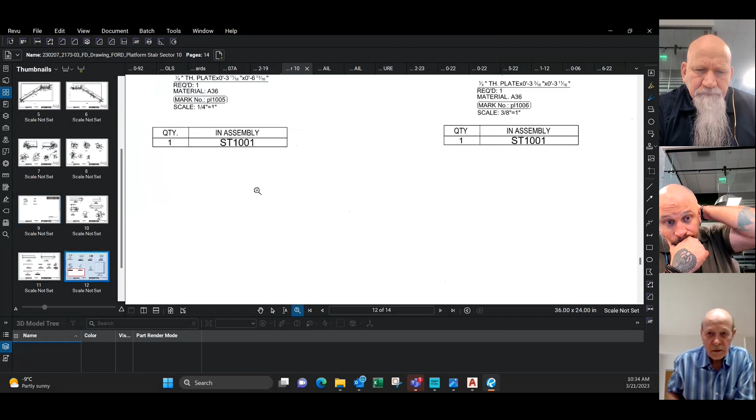And more parts, and the pans. I'm pretty sure this is created by Advance Steel, so these are the type of drawings we get. So that's kind of a typical set of shop and erection drawings, or IFA drawings, I guess they call them.

What else we got here?

For information, from job description, daily tasks, and project process as seen from DW perspective. Well, job description, mine's checker. I guess you guys will be detailing, so I guess your job description is detailers.

Daily tasks, the draw. And project process, usually we have a huddle. I'm in drafting team number 1 huddle, I'm the job captain for that. I have 3 draftsmen that I talk to every day, and we have a Smartsheet called a task tracker, and it's got all the jobs that each detailer is working on, and it's got completion dates. I meet with them on Monday, Tuesday, Wednesday, and Friday, and we go through that task tracker and just kind of keep track of where they are and how the job's coming along. So that's kind of the project process.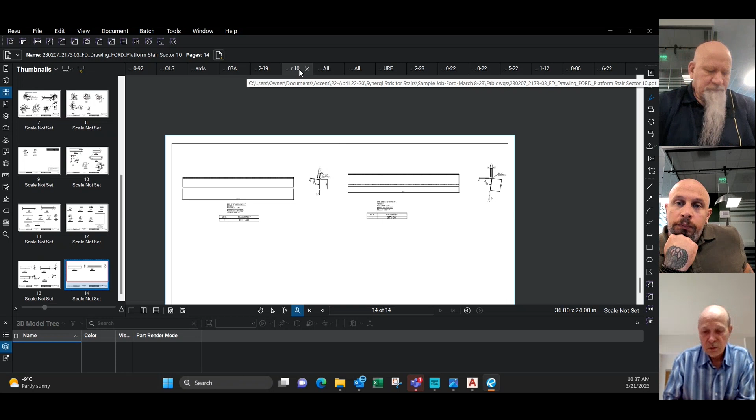I'm not sure if you guys have been assigned a team number yet or not. Edward is, yesterday, okay. Edward's kind of the drafting manager, so he kind of takes care of who's with who. I think he's team number 4, I believe, and there's Jason Hudson, he's team number 2, I think. I don't know if we have a job captain for team number 3 or not, but that's up to Edward. He would assign which team you're on and who you report to each day if you need to report each day, but I guess Edward would be setting that up.

That's about it for today. I guess we still got a half an hour left. What we could do, I guess, is go over another job that I've got here.

I think you guys are probably lined up to go for some training with Denis Lamoth probably later in the week. He's been with Synergi for quite a while as well.

And this is one of his sets of drawings. It's the cover sheet, and that is old because this job was from 2016. But this is a set of drawings he did for the JFK Center in Washington, D.C. I don't know if you guys are familiar with that place. This was an addition to the theater. I think they made it kind of for meetings and lunches and dinners, and I think there's rooms for ballet artists to train and stuff like that. So kind of an addition to the actual theater area.

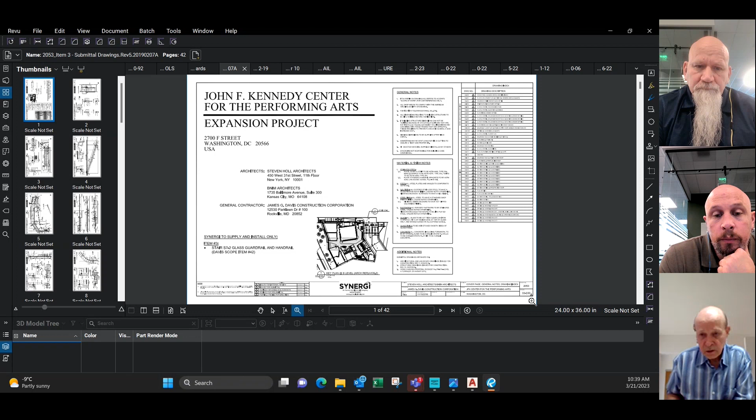Synergi spent 3 years on that project, I believe. There were quite a few items. This was one item that Denis Lamoth did, item 3, it's a guardrail and a stair.

So we'll just flip through the job. I don't know if you guys will ever have a chance to go there, but it's pretty interesting. This particular job had glass guardrails in shoes, but instead of shoes, sometimes there's a support angle underneath, or we anchor them to concrete. This particular job used Hilti anchors.

They were called Hilti HAC anchors. So we had to show the location of each of these anchors.

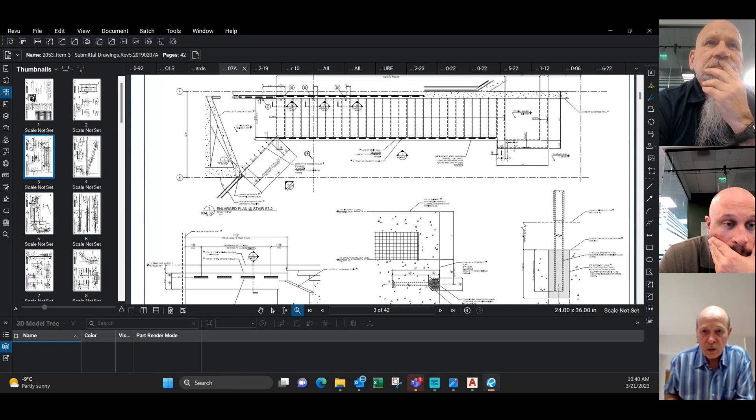Originally, Hilti does make these anchors in longer lengths - I think we have a picture of one somewhere. They did make them longer, but when we asked to order them, we found out they're not an in-stock product, so you have to order them way ahead. We didn't have time to wait, so we had to use what they had in stock.

So we had to use 12-inch long anchors, which was kind of a nightmare because we had to tell whoever was setting them in the formwork exactly where each anchor went. Denny spent a lot of time on these drawings, locating all the Hilti HAC anchors, so that when we did our shoe, it matched up with these anchors.

So that's the stair, and this was an elevation of all the anchors down the stair. That's a section through showing the anchor.

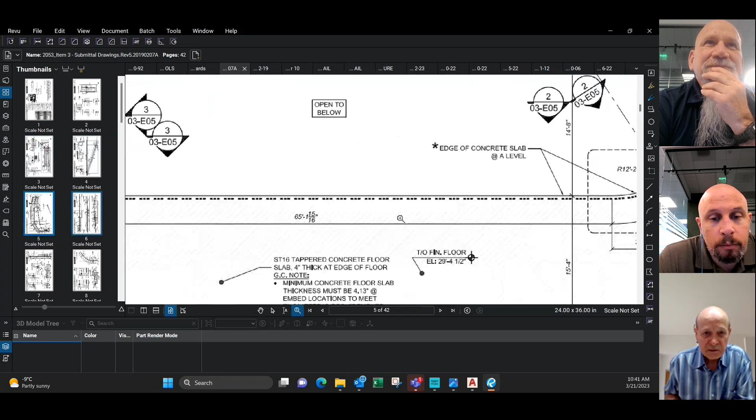And then this was the plan showing where all the anchors are - a curve here and a curve here, and then down a ramp. This is the stair we were looking at up here, and there's an L-shaped area over here.

And just some elevations showing where all the anchors are, more of the anchors, more details around the curve, and then the anchors around this area.

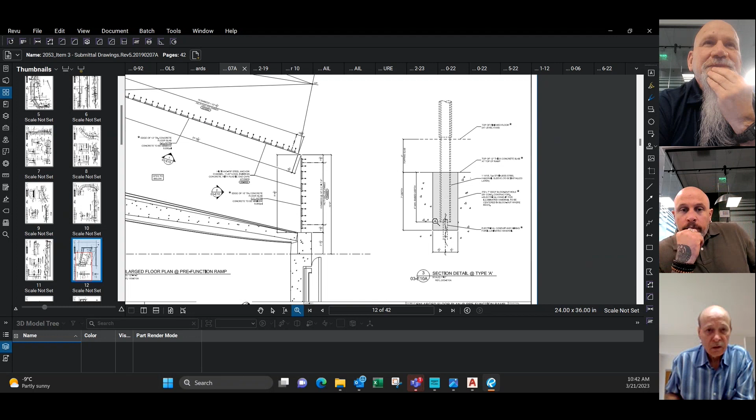We also had to show where our core drills were because the handrails were lighted. So we had to have hollow tubes set in core drilled holes with a conduit for the electrical wiring. We had to tell them where all the core drills were located as well.

So it was a lot of coordination. These are in the walls - there are also holes in the walls where the handrail connects, and the wiring comes through there too. There's some details of that later on.

And then this is where we get into the actual guardrail, and the stair, showing the glass on the sides of the stairs.

And then we get into the elevations. These are the actual glass panels, and they're very, very large. The size of the panels, as I'd mentioned before, is kind of dictated by what's shown on the contract drawings, as well as what Synergi can do.

If we look at the contract drawings and it looks too long, we may need to go to whoever's fabricating it and make sure we can make it that long. So that's something that needs to be checked.

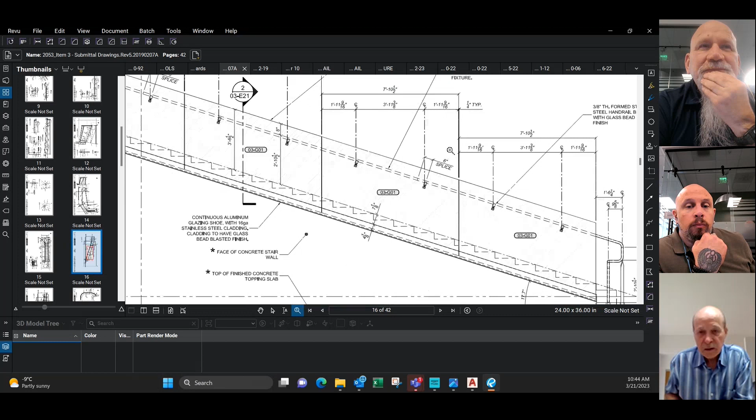This is one particular job where we had a quarter inch gap. We tried to get them to change that, but they were adamant about a quarter inch joint. This shows the field joint for the handrail.

This particular elevation was taken not on the stair side, but on the outer side, because we wanted to show the shoe as well in the elevation. So instead of showing the stair side, he showed the outer side, which works because you can see everything - as long as you can see everything. And he's got all the marks for each piece of glass.

And then this is the other side of the stair where there was a wall rail. It was anchored to the concrete wall up to about here, and then there's no more wall, so we added posts set in core drilled holes. Same thing - he has a drawing showing exactly where that core drill hole is, so they could locate it on site.

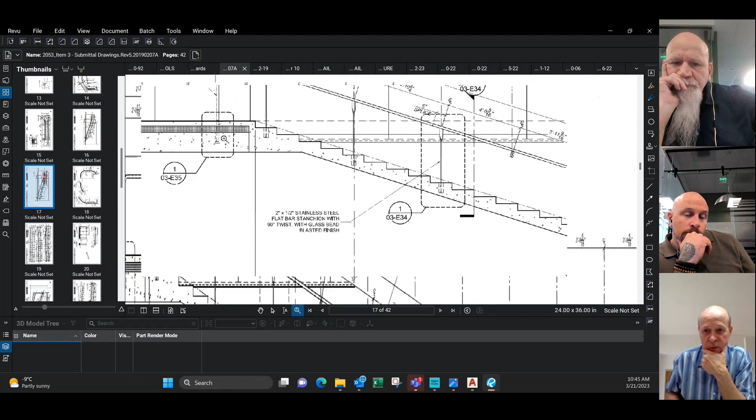I think it was the glass rail that was wired for electrical lighting, not this rail against the wall. And just some details and elevations - it's got all the piece marks on it. We had some cladding here, I think - no, it was gypsum board.

Just a detail of a gate. I think they didn't end up putting this gate in. That gate was at the top of the stair here—actually, I guess on this one. Yeah, I think it was over here. I think they decided not to put that gate in.

And then the L-shaped area, you had a wall rail here, and then around the opening. And some elevations of that same area. And then we get into the details.

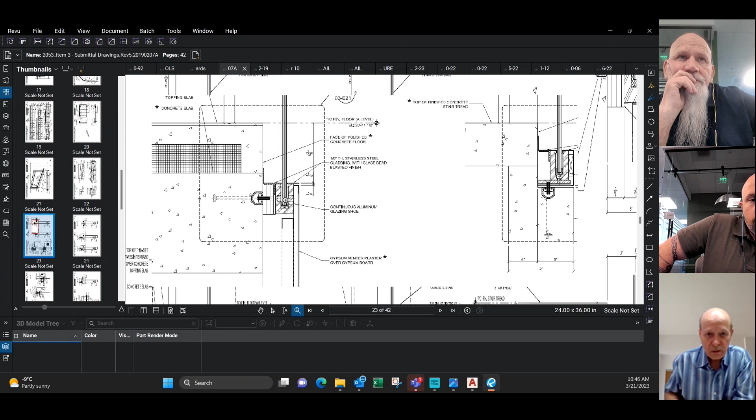This is the side mount shoe. So we have the Hilti HAC embed, and then we had a bunch of shims. The shoe, and the bolt, went through the side of the shoe into the Hilti HAC with a little T-bolt.

And this is a detail along the side of the stair. Same thing, there's your Hilti and your glass. And then this is just a section through the glass, and he also shows blown up details, which is good, which shows all the different components that were used—the shoe, the nuts, the bolts, the cladding.

All the different bits and pieces. And then more sections, more details, more details. This detail was a plan view of the shoe at the curve.

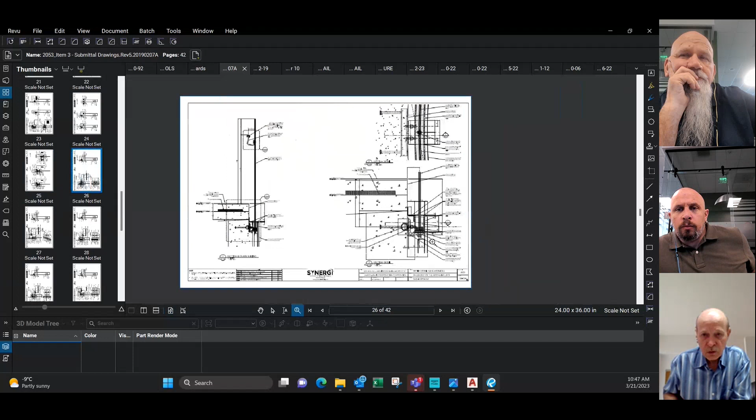We couldn't get the shoe curved. Not sure why at that time, because I know now we've done some jobs where we've had the aluminum shoe rolled. But I think at the time that was an issue, so we actually made this shoe out of steel rolled plates—quarter inch thick plates, I think. So we actually built the shoe. That's something that needs to be questioned with the project manager, whether we can roll the shoe or if we have to do something else.

And just a few more blown up details, and then we kind of get into the handrail bracket details, I believe. More details of the handrail.

And this is the handrail. It was field welded to the bracket arm, and then the bracket was attached to the glass with a countersunk screw. We had a neoprene phenolic machined insert washer—it's plastic basically—in the glass. The guys on site had a lot of fun with this washer because it would squeeze into different shapes and stuff.

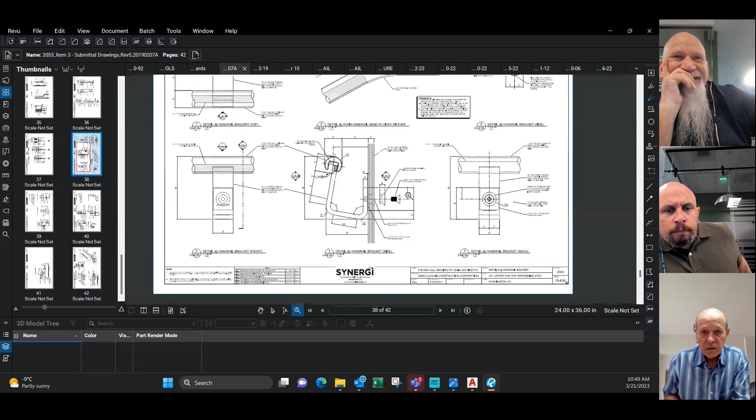One of the things we found with the rail—same thing—the manufacturer couldn't roll this particular type of top cap because it would just squish. So we had to use this type of molding up to this point and stop it and shop weld it, and then the same type of molding up to here, stop it and shop weld it, and then this piece was a no-channel piece of handrail. So it was just a typical round tube we had to use at this point, and then the wire would just go through it. But because they couldn't roll this, it would just mush or deform, so we had to stick in a piece.

But that's something you usually find out in the detailing process. The project manager will let you know something like that if they can't roll a piece or something.

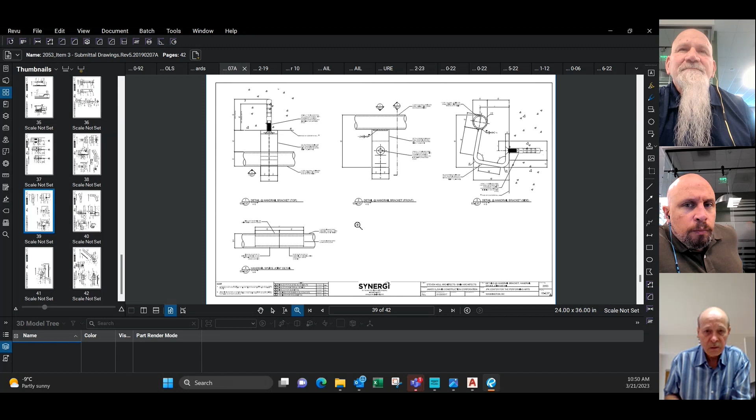And this is your typical splice, handrail splice, same as the one we were looking at before. And then this is a bracket connection where we're attaching to the wall.

We've used them on a few jobs. There's all different types of ways of anchoring, but it's something you'd discuss with the project manager and the engineer too, who has to sign off on what type of connection we're using. Sometimes we're told that at the beginning of the job, or sometimes we'll just decide to use it and send it for engineering to see if they sign off on it or not.

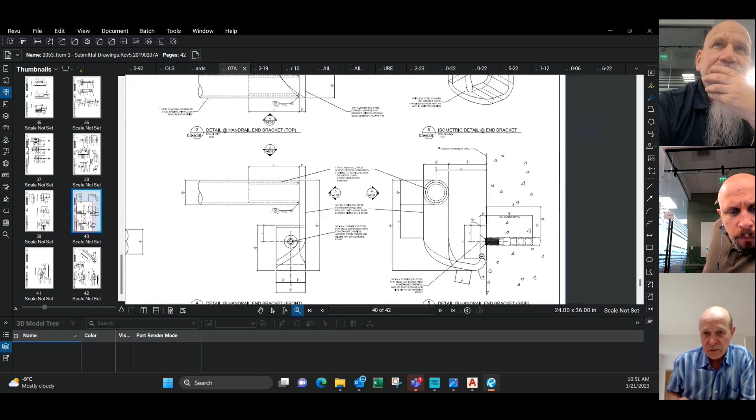And this is what happened at the ends of the handrail runs—they actually stopped them with a bracket and did this kind of wonky bracket at the end. A little bit different way of stopping your handrail.

And then this is a handrail connection where we had to run into the wall. Same thing, we had to tell them where that hole was so the electrical could put their conduit and set it in concrete, so we could set the wire through for the lighting. So, fun coordination—and then we had to go out and site measure and just make sure that hole was where it was supposed to be.

And I think this job was actually one of the last jobs where I was doing a lot of site measuring. So that was quite a few years ago, I guess—2017, so 6 years ago already. But they have new teams that go out with scanners now.